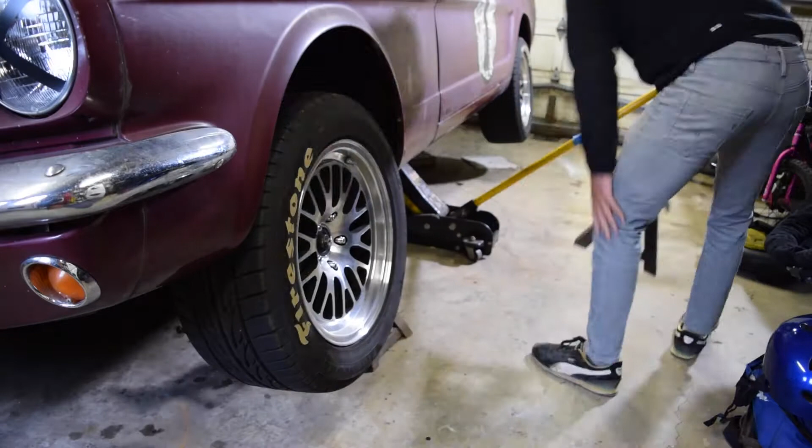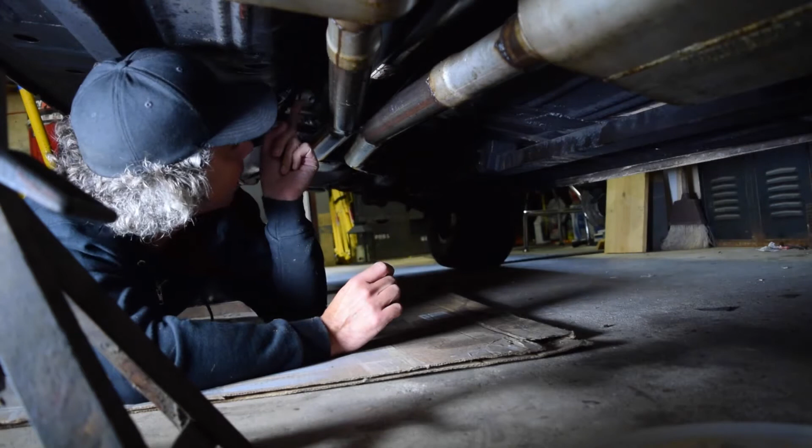Our episode today begins under the car, where we're going to be for a good amount of this episode. What I need to do is take my Lokar parking brake out, because if you've installed your own Lokar parking brake according to the sheet that comes with it, they have you mount it on the underside of the car. If you have a Mustang, or I've read on forums there are other cars where this happens, the drive shaft makes contact with the bottom of the parking brake, bends the brackets, and you're out of luck.

So what I need to do is take this out and mount it from the top, which requires clearancing the hole I did initially, making sure it's top mount, and making sure all my bracketry clears. Once I get that done, I'm going to take my original parking brake cables, which are for this Granada rear end in my Mustang, shorten them and make a bracket to connect it to the Lokar handbrake.

Lokar does sell a kit for this, which is $180. I don't want to spend that amount of money. I've got some scrap metal parts, and I had to buy some special tools, so I'm probably about $50 into this DIY approach, which will save me about $100, maybe a little more. I figured this is worth a shot. If it doesn't work for whatever reason, I can always buy the kit later. But for this car to be a functional daily driver, it needs a working handbrake. So that's what I'm going to do.

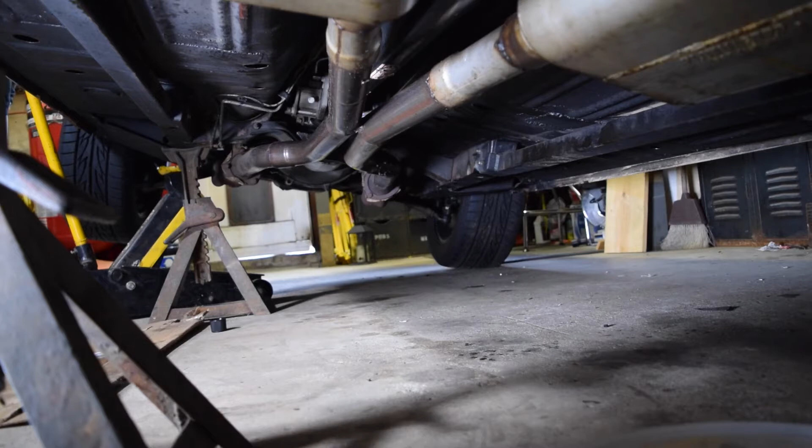Brake clean, it's awful stuff. You see channels or articles or forum posts, guys bragging about how much brake clean they use, and the Roadkill guys are guilty of this, I've got to call them out on it. Not that I'm any kind of celebrity, but brake clean is awful stuff. If you brag about brake clean or consider it a manly thing to use a lot of it, good luck with your cancer in 20 years. That's all I have to say. Really, really nasty stuff. I inhaled some of the vapor, even in a well ventilated area. I'm sure they say it on the can, but I don't recommend this stuff. It's just caustic. If you can get away with simple green and a rag and some scrubbing, that's highly advisable over brake clean. So, safety tip for the episode.

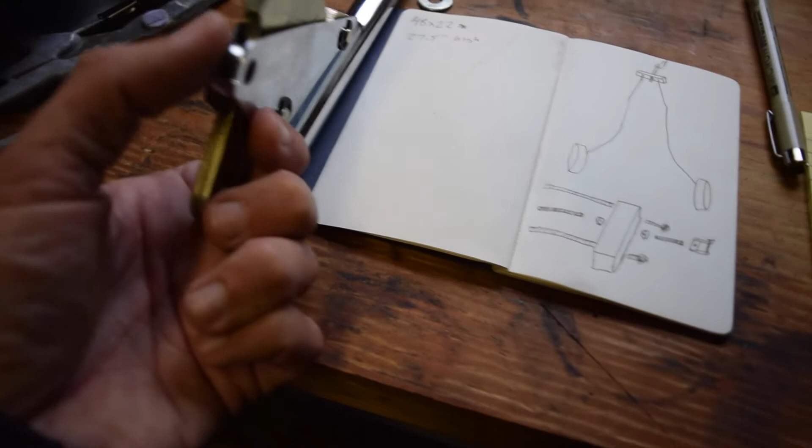Alright, so here is the general plan. I've got this Lokar parking brake uninstalled. You can kind of see here where it... focus. Alright, so this got bent when the drive shaft hit it. My drive shaft did come out and was bouncing around, so that's probably why this got bent, although there are marks, like a circle mark around the drive shaft, a concentric mark.

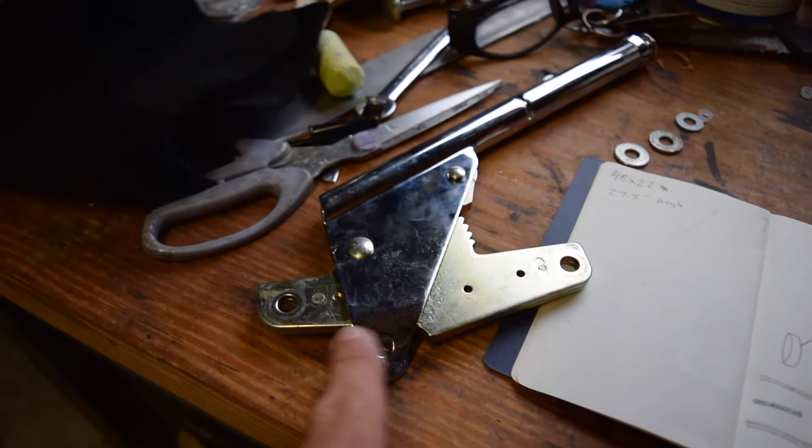So I know this was contacting it. What I'm going to do is use an alternative mounting position where instead of mounting this below the floor, you mount part of it above, but that requires cutting a wider oval here so that it clears everything.

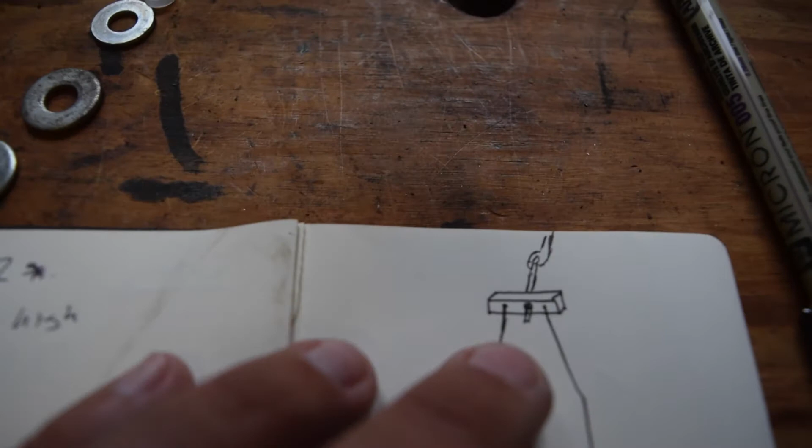So basically my plan, as you can see here in my non-engineering based drawing, it's more like a cartoon: here's your system, here's your rear drums, you've got your brake cables going all the way up to this block, which I'm going to create out of square stock, and I'm going to have a threaded rod going through there so I can adjust the tension, and the cables will pass through the block and then terminate on the other side. By terminate, I mean they'll have some sort of stop on the end.

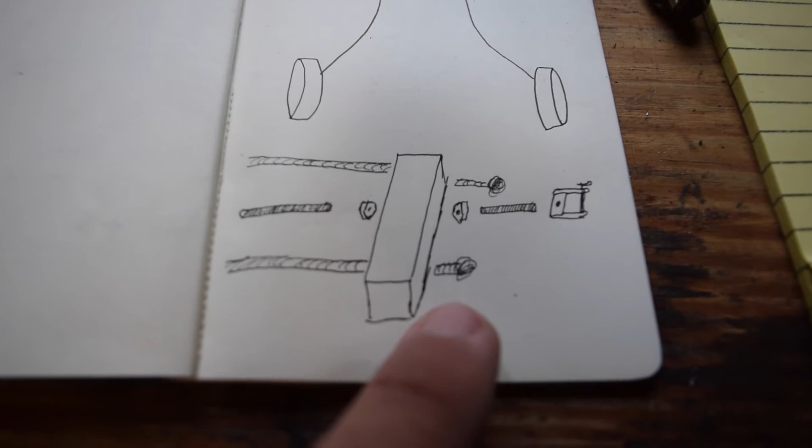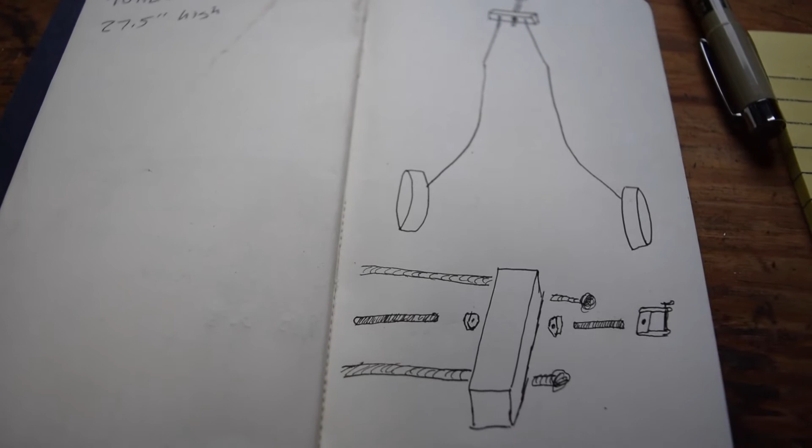What I've read online is that people have had good luck doing this: you basically put the cable through a nut, and just bash the hell out of it with a hammer, and that works better than welding a bead on the end.

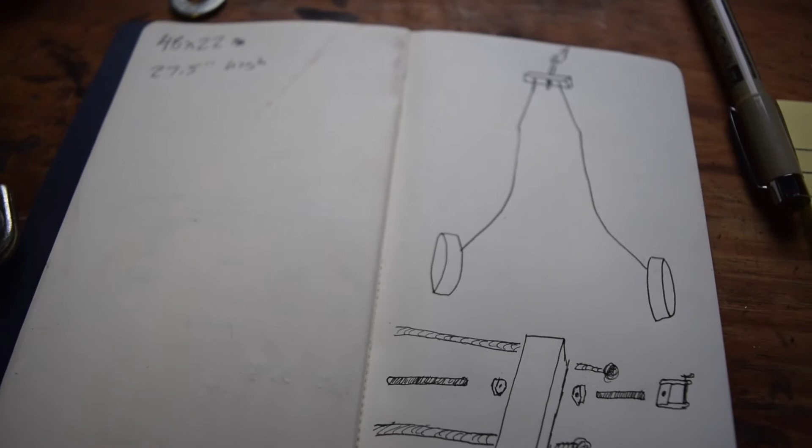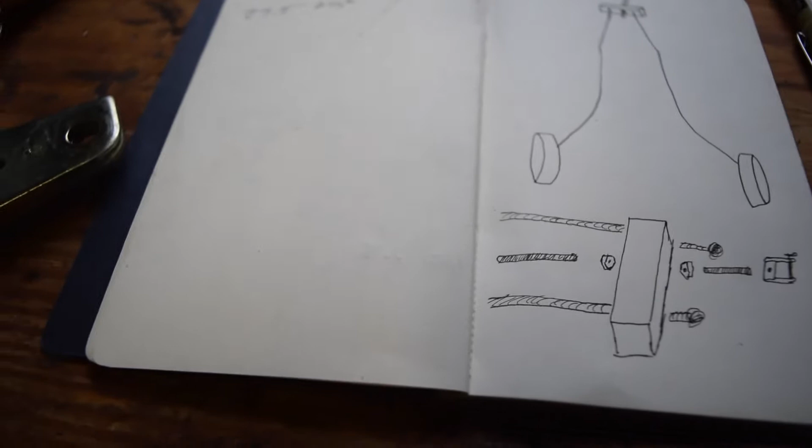It works better than the cable tie things you get at Lowe's with the nuts, and it crimps it. So anyway, I'm going to try that and see how it works. Then finally here I'm going to have the threaded rod going to this clevis that sits down here. It attaches to the bottom of the handbrake. So basically I'll have to have the threaded rod going through this hole, so I may need to enlarge this hole or do something there. So I'll be doing that as well.

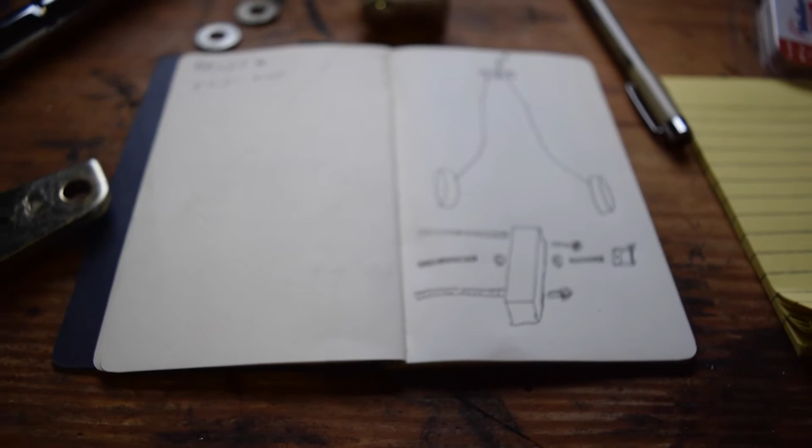But for the moment, I'm gonna finish having my coffee, and then I need to take the rest of the brackets out of the top of the car. I need to trim my carpet a little bit, and then reinstall the handbrake from the top. And then we should be good to go - good to go on starting the next part of the project.

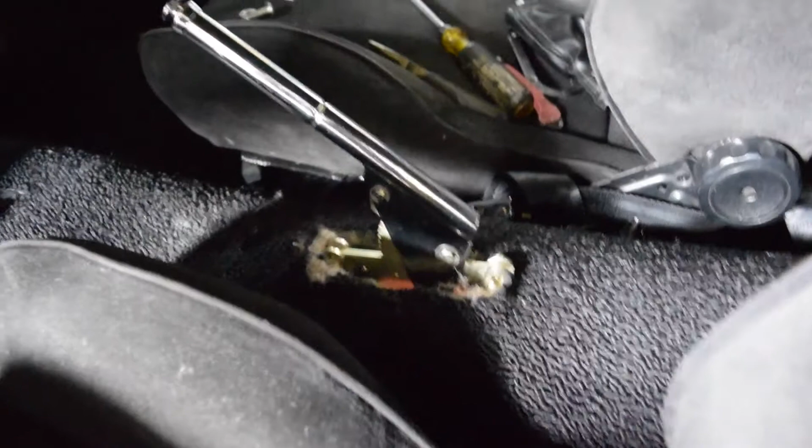Alright, so a little update on where we are. I've got the brackets turned around, and I've got this thing mounted up in the car, and actually I will pull it out so you can see. So what I had to do here, if you can see that, I had to re-drill some new holes in these L brackets that came with the kit, basically to sit the...

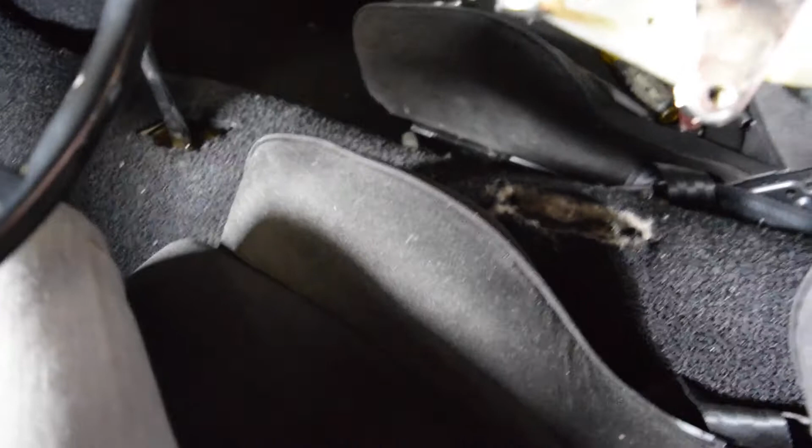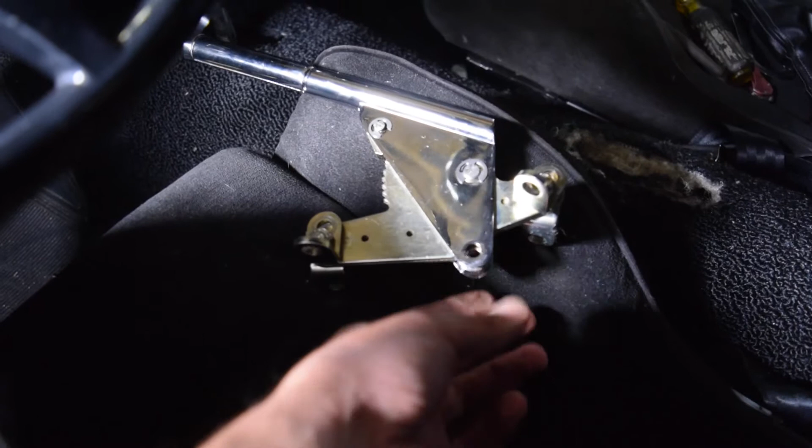So I guess, how it comes from Lokar, it gives you brackets, and you can install it one of two ways - up on the floor, or below. I had it installed below the first time, and that didn't work. I tried it with the brackets with the stock holes on top, and that actually mounted it up too high, because this basically gets caught on your floor, and it doesn't allow any kind of free movement, especially with the cable and everything attached to it.

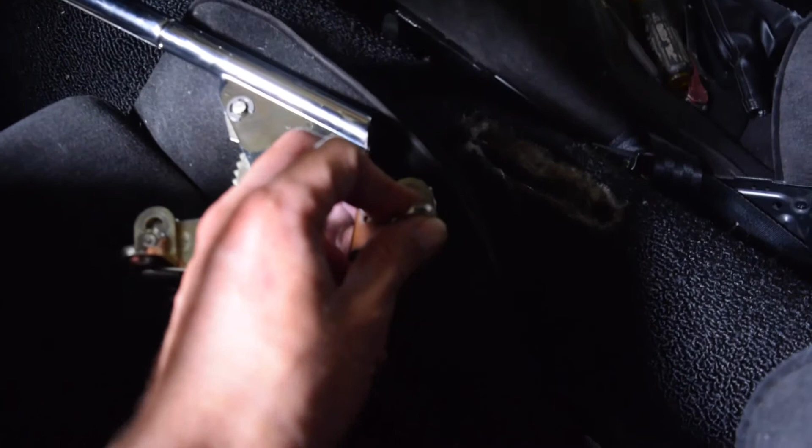So what I did was I punched some new holes and drilled some new holes in these brackets, probably moved it about half an inch down. So it kind of sits right in the middle. So what has to happen now is there's a bracket that I showed you guys before that goes on here, which attaches to the cable. And my hole, which you can kind of see here, is not wide enough for that to pass through. So I just need to come in here with a grinder and make this hole a lot bigger. So that's what I'm going to do now.

Haven't been filming a lot of this stuff because it makes for pretty poor content to just see me basically scratching my head at my workbench for a while trying to figure this out. But making progress. We're gonna do some grinding in my clean interior, just gonna get stuff everywhere, but it's gotta be done, so gonna get to it.

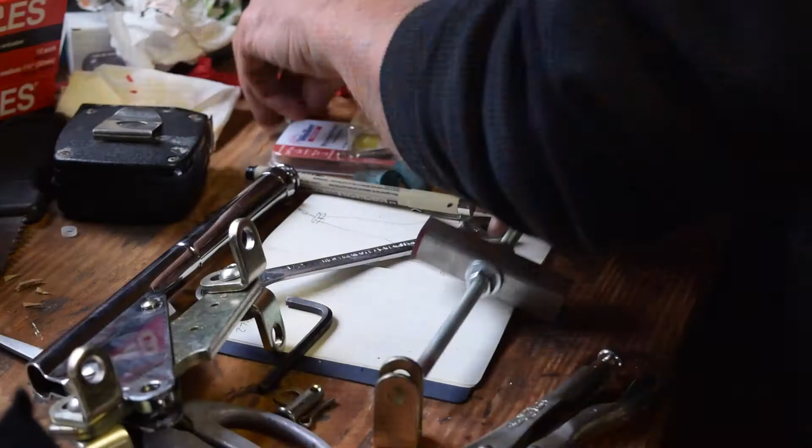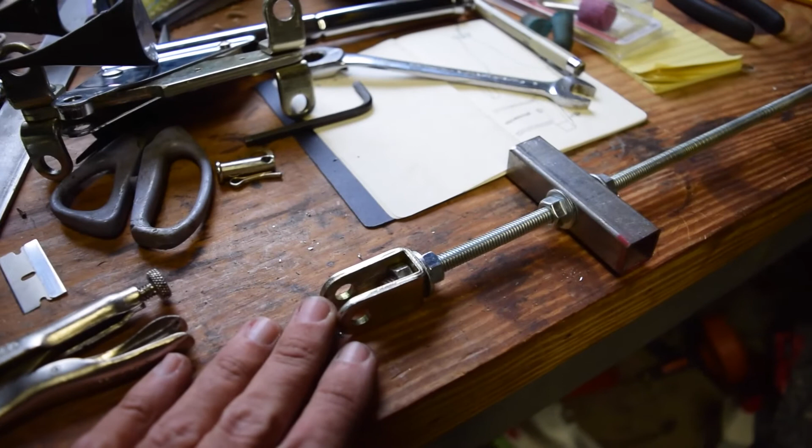Alright, so here's where we are. Got my threaded rod, have my square stock cut. Not sure where I'm going to put the holes yet for the cables, I don't know what size to drill. I need to cut some of the cables off to do that. But I've modified this bottom piece that attaches to here with the clevis, so that appears to all look pretty good.

So I think I need to come in here. I need to cut this threaded rod at some point. I want to make sure I leave enough for it to be adjustable so I can adjust the tension, but not too much so that it looks weird or behaves weird or interferes with really anything else.

So next for me is back under the car. I need to cut my parking brake cable, the existing one, and figure out how I'm going to put some cable stops on that so it stays in place, so they don't pop off. But yeah, back under the car.

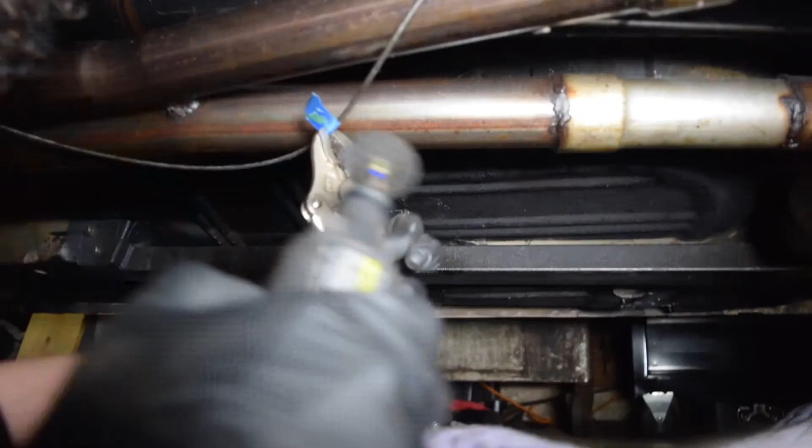And here we are, update time again. This seems to be the way this episode's going. Yeah, with stuff like this and under the car, it's just hard to film and not look like a total spaz when you're under there trying to get stuff done, because it's usually 10 times harder, as you guys probably know, than doing it anywhere else on the car. Maybe the exception of under the dash.

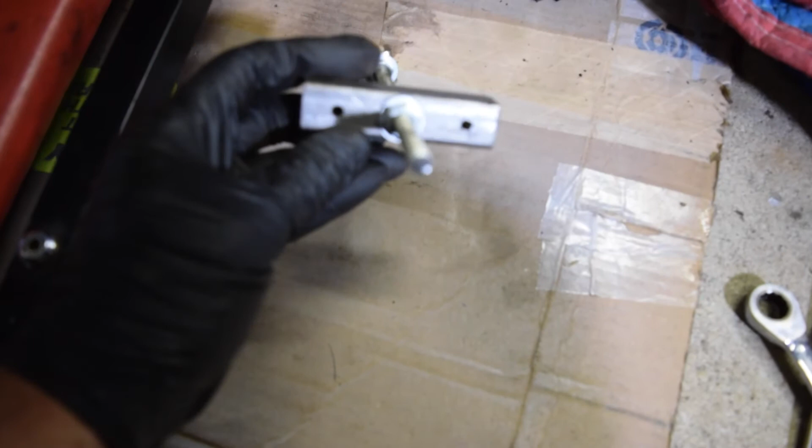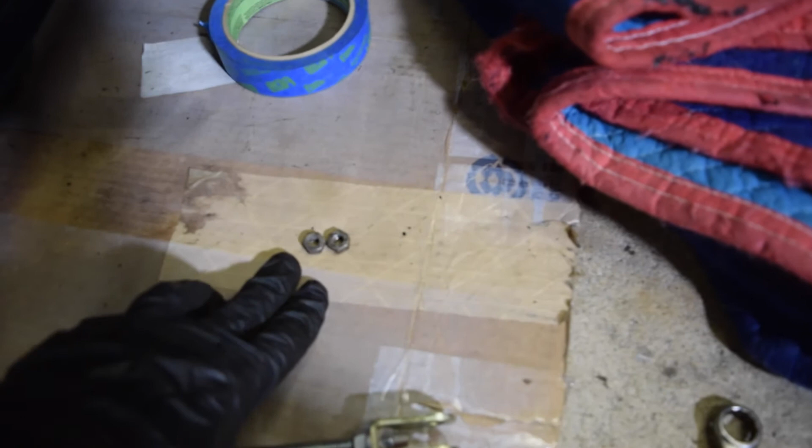But anyway, so here's where we are. I've got this piece made up. I've got the holes drilled for my brake cables to pass through. I've got it mounted and secured to this clevis pin. So basically all that needs to be done now is for these little nuts, whatever, for these guys to be pounded. Oh, this is just going all wrong voiceover wise.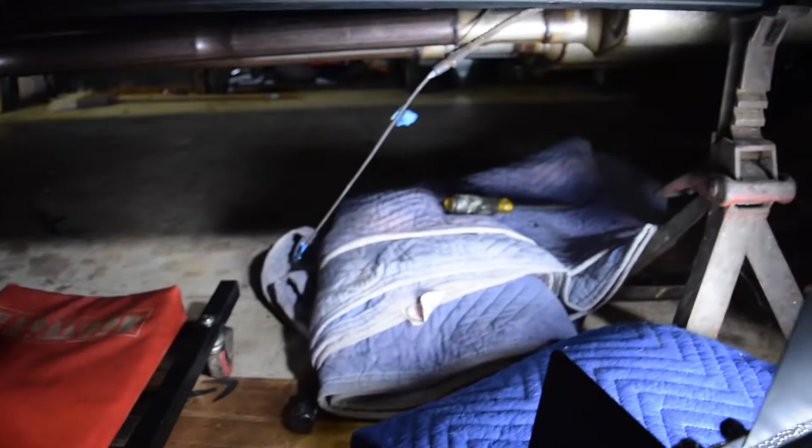So these things need to be attached to the end of the brake cables, which I've pulled down. I had to pop off these little retaining cotter pins to give myself some more slack. Basically everything has to stay above the exhaust and above the drive line, which makes it trickier. I've got two giant hammers - I'll use one as the anvil behind it, and one as the striking implement.

I'm going to do the shorter cable first because that's coming from the far side. If I do that, I can match the measurement hopefully on the near side cable, which should be a little easier because I have more slack on this side. I'll attempt to film this - I don't know how it's going to turn out, but you'll probably get to see me get really frustrated and then hopefully be successful.

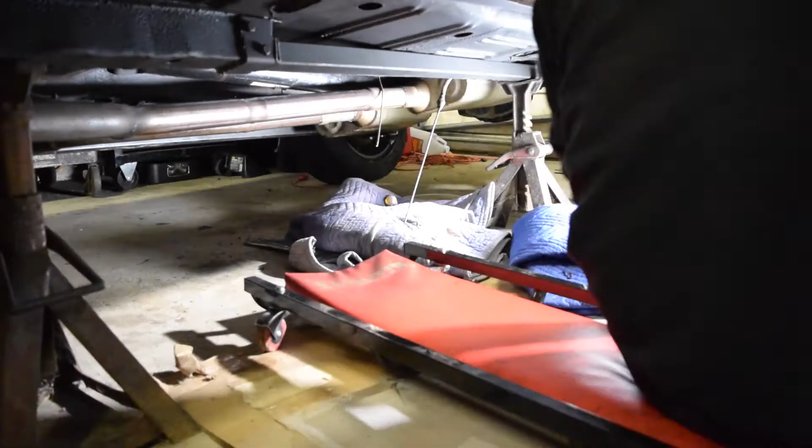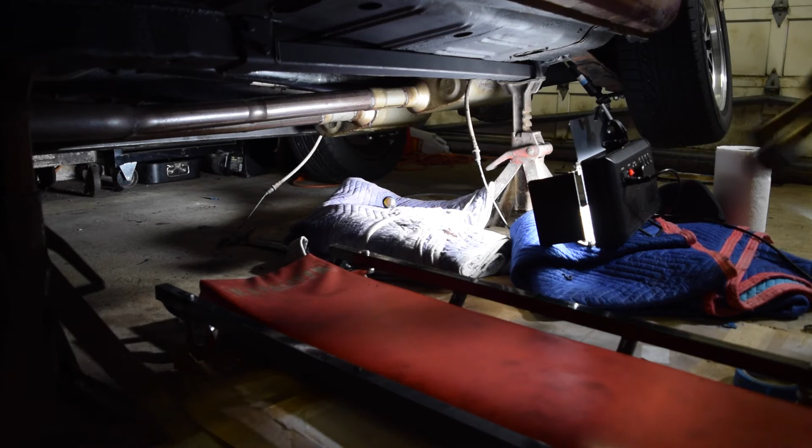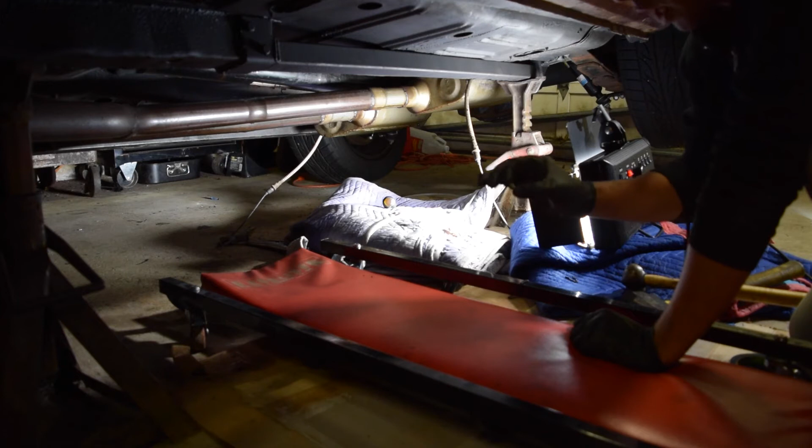Alright, quick update - I realized I could do the other side on the other side of the car, so I was able to pin it against the ground and hammer it over there, much easier. I also pre-bent these - pre-crushed these nuts in the vise. This is just all wrong, innuendo-wise. Yeah, anyway, it's more of an oval shape now. It's pretty close to being fully pinched.

So now I just need to bring that back over the drive shaft, over the exhaust, and somehow get this last nut pressed onto my cable. This should be fun.

I'll be right back. Alright, I'm back for the real moment of truth. So I now have everything reattached - all the e-brake bracket, geez it's getting late - all the e-brake cables attached where they belong, at the mount points on the car. I've got my contraption down here and assembled, so when I pull this, I should feel the tension and the rear brake should engage.

I did feel it, so that's good. Felt some resistance. That should be it. I might have to go down there and just take the slack out of the lines a little bit, because I don't know exactly how much it's engaging. So yeah, I think I still have a little slack in the lines, but whew, that was a long day, but it's good. Alright, I'm gonna button everything up and I'll get back with you guys to close this one out.

Alright, so that is a wrap for this episode. I feel really good - it's been a long day. Started at probably 9 this morning and I don't know what time it is now, I think it's like 7 or 8 at night. So a full day to do all this.

But super excited because this is basically one of the first things that I've kind of imagined from scratch and it actually worked. That actually remains to be seen - we'll see how this thing actually behaves on the road, if my method of locking the cables with those little nuts bashed on the end, if my square tube holds up. So there's a lot of moving parts, we'll have to see how that goes.